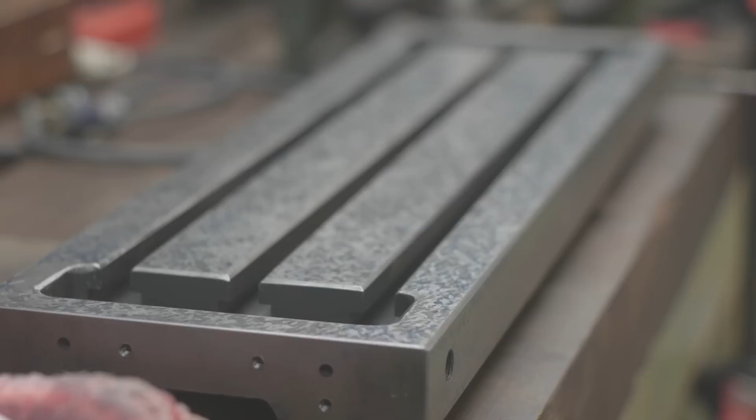He's a professional at scraping and we're going to try and make scraping fun to watch. So we're going to be doing the mill table exclusively in this video. We're going to be scraping the top surface all the way through to the dovetails.

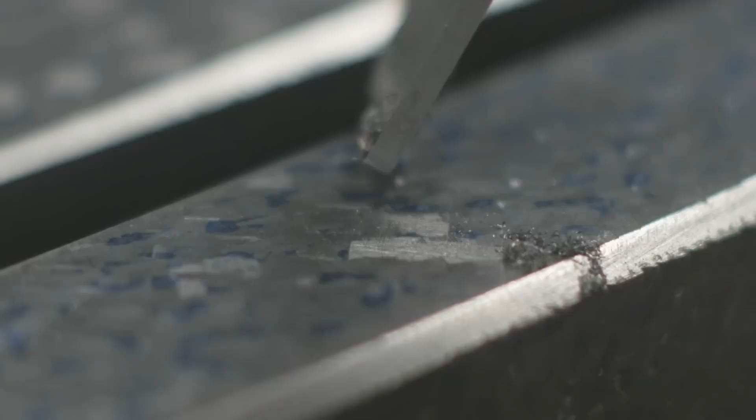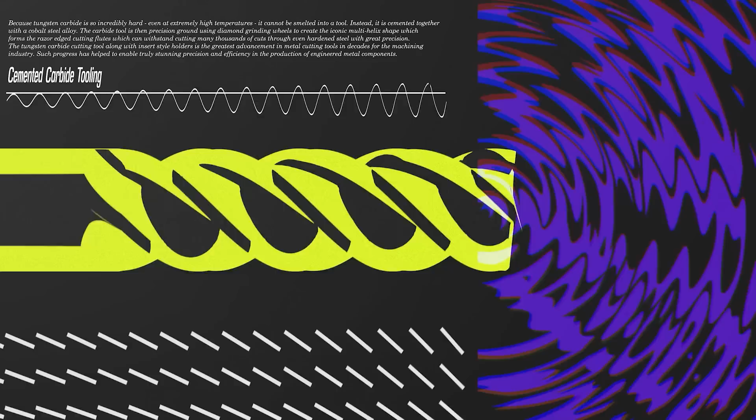The goal of this video, and really the subsequent series that's going to follow, is to take everyone through the process of reconditioning one of these Chinese mills to have proper precision, have good scraped bearing surfaces on all the dovetails. Through the help of my friend Marcus in the Gold Coast, who is an expert on the subject, I've learned so much from him. We'll be getting actual professional help as we go through this whole process. So we're really excited for it, and I hope you like it too.

Scraping is one of those engineering skills that tends to be just as much of a practical discipline as it is an art. I think that's probably because machine builders tend to avoid it because it's slow and expensive and you need a very highly trained person to do it. But there is some serious advantages to it. And the goal of scraping is usually just to make a flat surface, but that's not always the case.

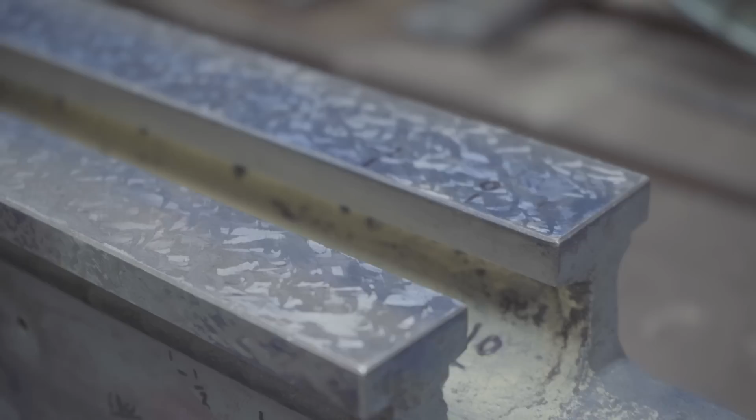A flat surface might be good for making bearing surfaces that need to run straight and true. But it could also just be for mating two rigid mounting points, like mounting the column to the base of the mill. That's not a moving surface, so it doesn't necessarily need to be flat. They just need to mate up with a lot of contact points for rigidity and to hold the column square. So scraping is more about matching surfaces rather than making flat surfaces.

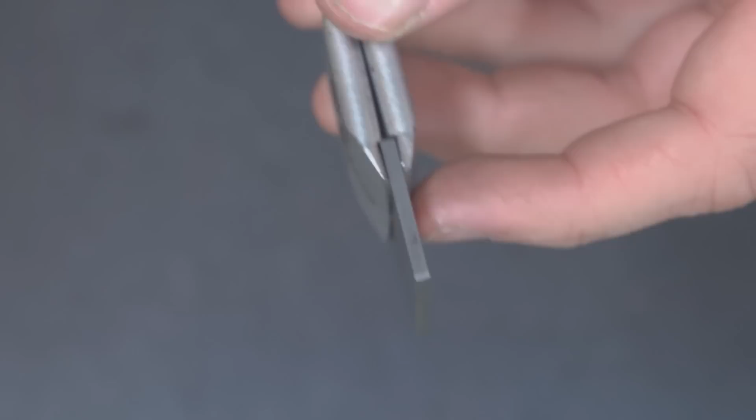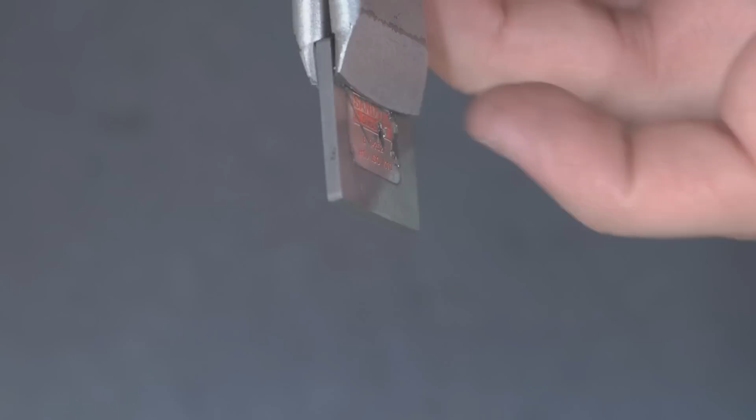To scrape those blue high spots, you'll usually use a scraper, which is creatively named. It's pretty simple, really. It's just a piece of steel with a handle, and you get this carbide blade. It's just a flat piece that's clamped in with this mechanism, a screw, and this would have probably a 135 millimeter radius across here. It's double-sided, so you can flip it over and use that one too. And those would be ground at probably a 5-degree rake right now.

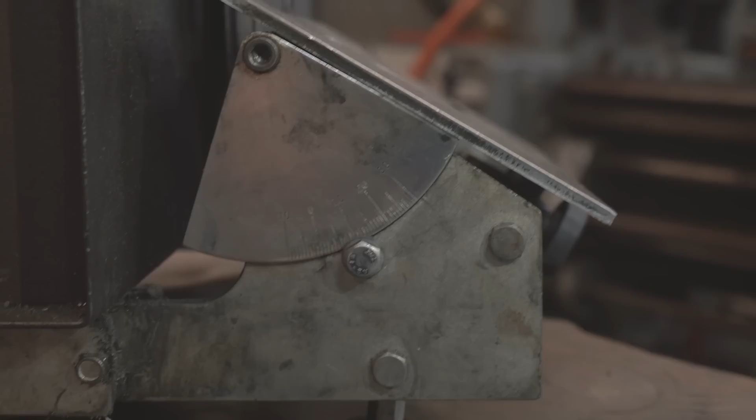To sharpen the carbide, Marcus uses this low RPM disc sharpener called an AccuFinish with diamond discs on it. So that's a pretty typical looking one. However, Marcus really likes this pommel type of thing, or mushroom as he calls it, which is good for being able to go off the palm and especially for going off the shoulder. This took me a while to get used to, but it actually is really valuable to be able to go off the shoulder when you're roughing, or really most of the time. It's quite good. So that's what he likes to use, and now I like to use that too.

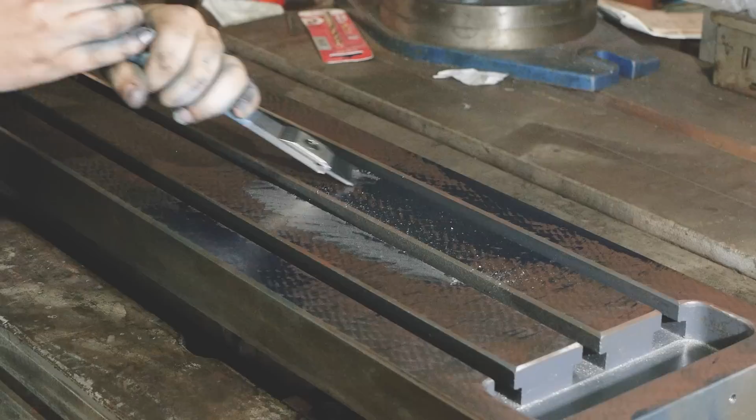And once you've scraped off all of those blue high spots from the first print, you go and do another one, see if the print pattern has changed or if you just need to take more off of the same spot, which is common for the start at least.

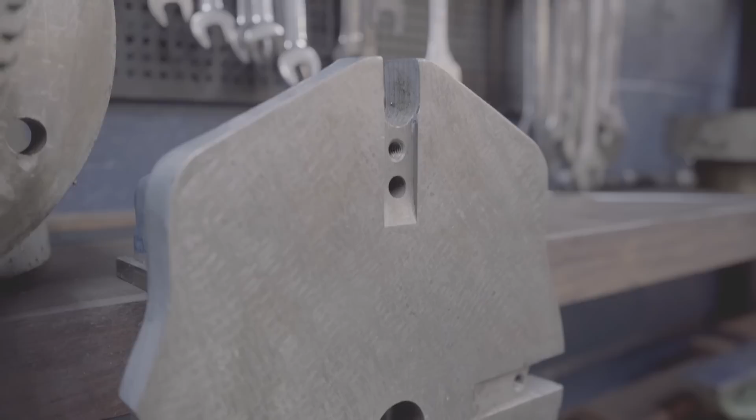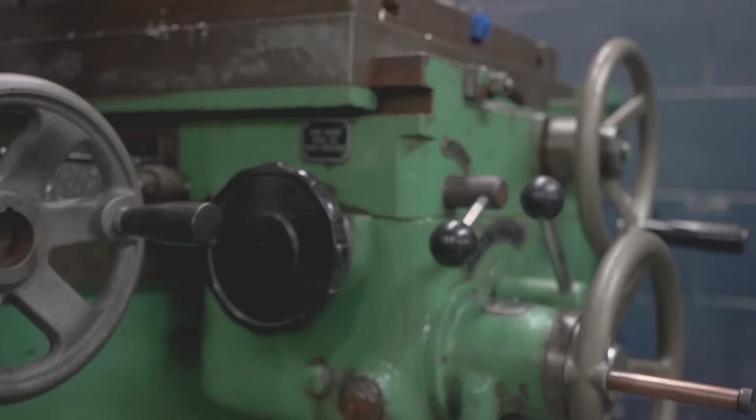So why would we actually bother with scraping as opposed to surface grinding? Because surface grinding is faster, it creates exceptionally flat surfaces. What are the advantages to scraping? Well, remember, scraping isn't just about making flat surfaces. It's often about matching surfaces. So there's one benefit already. What if you just need to make one part fit well with another? Or what if it's very hard to grind those pieces flat? What if it's a big heavy machine that's hard or even impossible to set up in another machine for milling and grinding? Instead, you can just scrape that part in place.

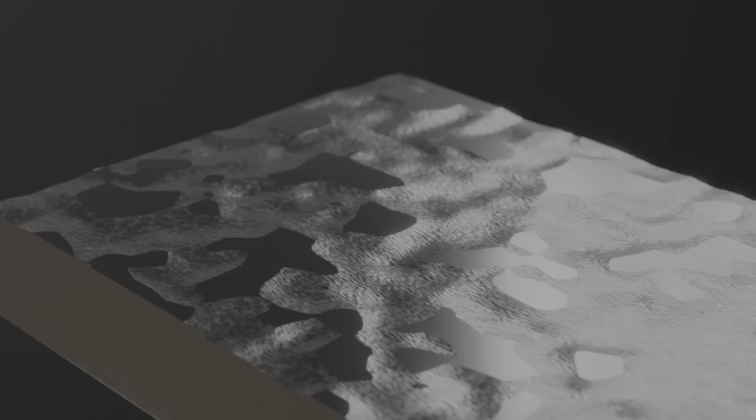Scraping is also especially good for machine slideways because it doesn't produce a smooth surface like grinding. The slight valleys leave space for oil cavities, preventing it from being squeezed out and binding those surfaces together.

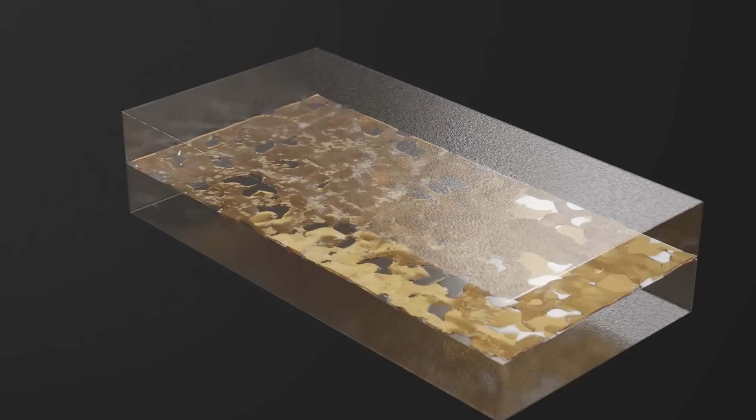To help visualize and explain the concepts in this video, we'll be using this digital replication of my mill table. Using this, I can easily produce certain effects like twist in the surface. I can bend it longitudinally and latitudinally. And I can also apply a height map over the surface to clearly show the effects of that twist and bend.

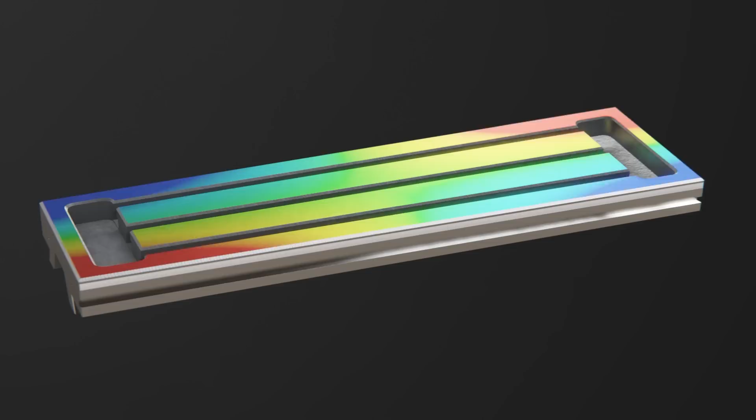And I can even produce concentrated high and low spots. Here's a key to help you read the colors. Think of the middle green as the idealized neutral height, the target of this visualization. This is what a perfectly flat surface looks like in this visualization. As the color in a certain area goes from green to yellow to red, it's deviating further from what we'll call acceptably flat. Now I'll introduce a pattern to imitate the texture of a scraped surface.

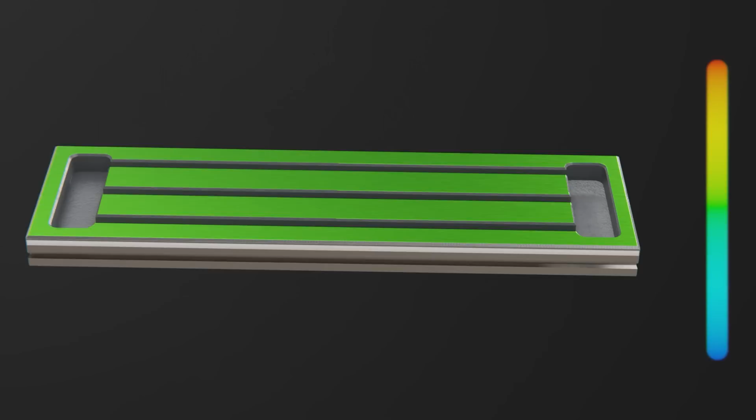The hope is that this will help clarify further what a surface is doing when it's scraped. I can also translate this directly to imitate a print against a flat surface plate. Throughout the rest of this video, I'll be using any combination of these effects to help explain what I'm talking about.

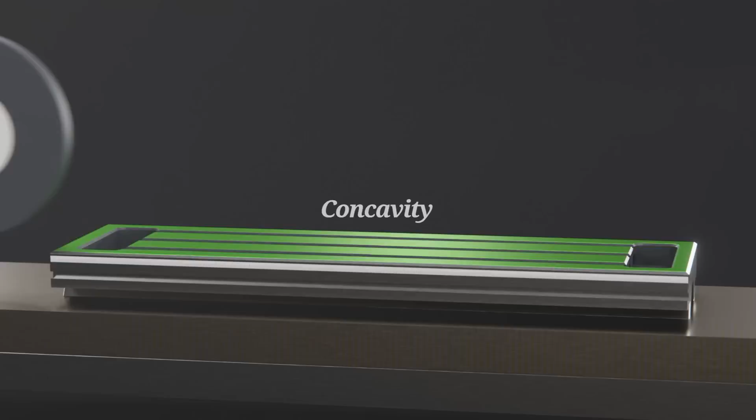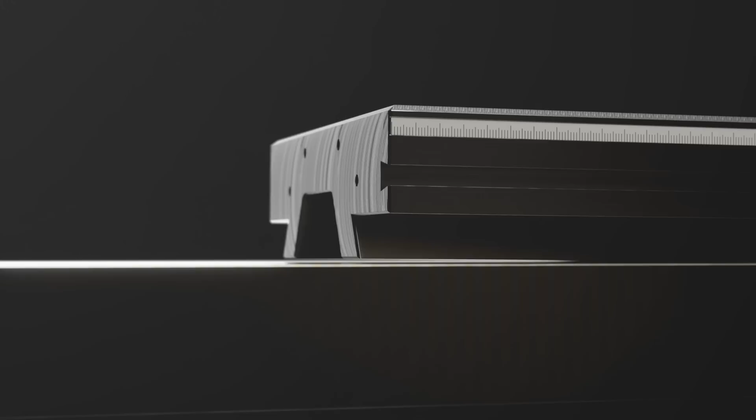The top surface is ground at the factory, which causes it to heat up, which makes it bow upwards, but they keep grinding until it neutralizes and becomes flat, and when it cools down, it becomes concave. Grinding also needs to hold the part rigidly in place, usually with a magnetic chuck. This will warp the part some amount, which springs back once released, whereas scraping doesn't produce any significant force on the part.

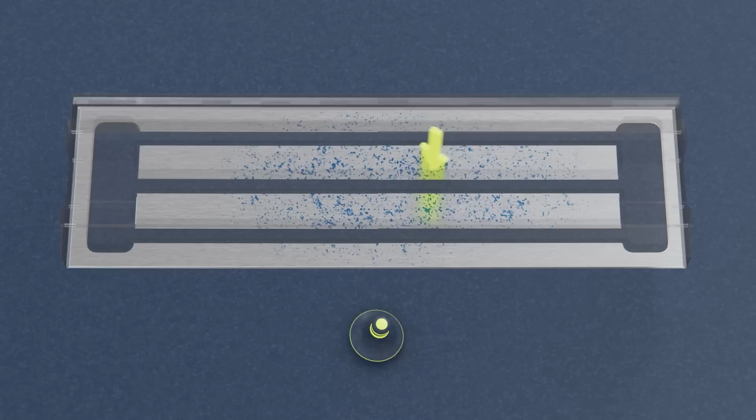One of the first things you want to do when scraping a flat surface is remove convexity, because if it's rolling around the center area, it'll print up a large area that isn't actually the high point. In theory, you could actually print up a whole convex surface by just rolling it all the way around, and it's misleading. You'll look at it and think it's flat, because look, it's all blue, I've got a flat surface, but it's a misleading print, so you need to stabilize the surface.

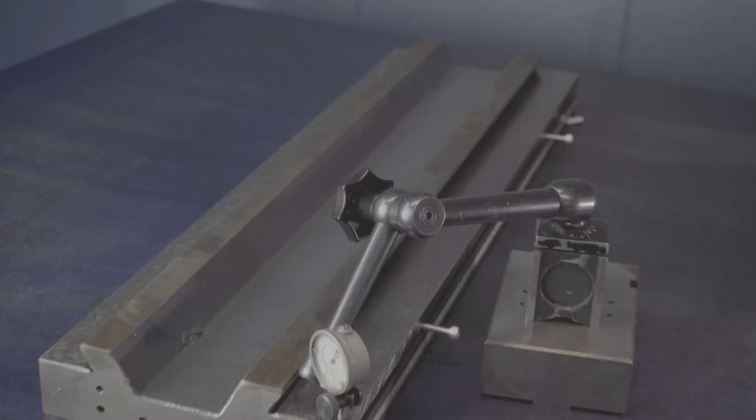A way to check for convexity is to lay the table on the surface plate, put an indicator on one corner, and press down on opposing corners to see if you can rock it back and forth.

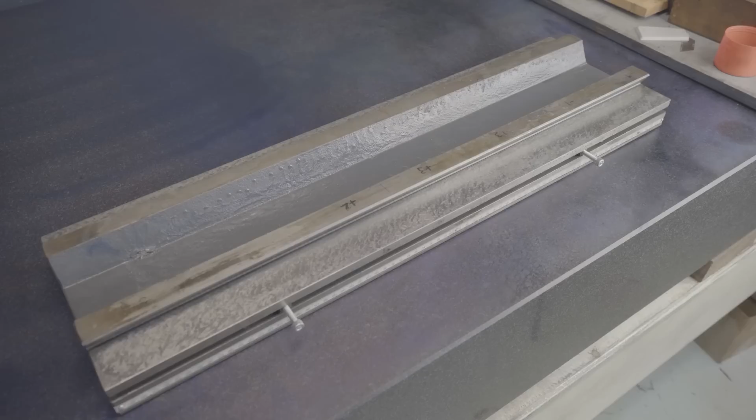As an example of a pivot test, this surface should be pretty flat on the table, so it should have a fairly vague sort of pivoting action. I can tell that it's pivoting around here a little bit, so maybe that's still a slight high spot, but it's kind of vague and it's hard to move.

If there was a convexity and it was sitting at this point very distinctly, it'd be easy to spin and it would clearly pivot from there. If it was twisted and this was the high point, it would very clearly pivot from that point over there. And if I was moving this side, it would pivot from there.

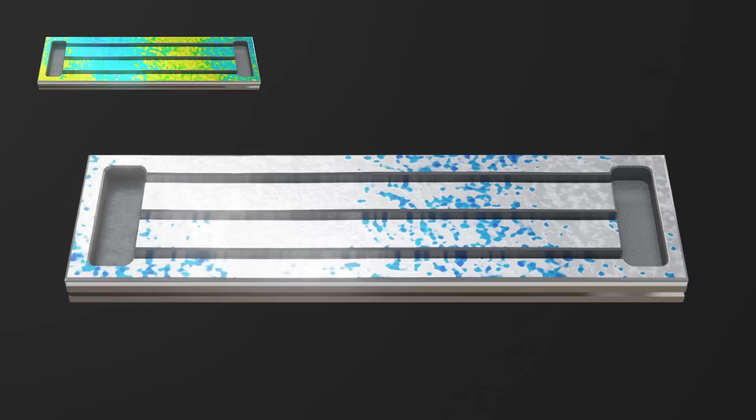First, we roughed out that patch near the middle. Then we took out more material from the middle to eliminate any further convexity. Then gradually brought in the corners and ended up with a stabilized surface.

And once the roughing was done, we started focusing on getting a higher PPI.

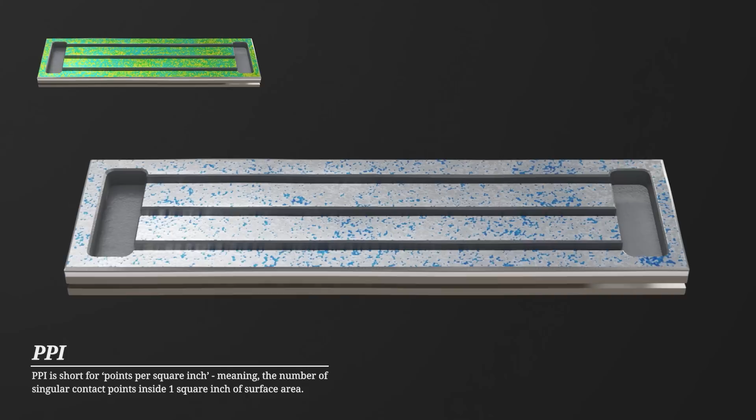I found it really easy to start scraping lighter and lighter because you don't really know how much material you've removed yet. When you're not used to it, it's hard. You're worried that you're going to stuff up the surface. So you start scraping lighter and lighter, and you might even start being a perfectionist and try and get all these little bits just right, when really you've got heaps more material to remove before you're even close to having a flat surface.

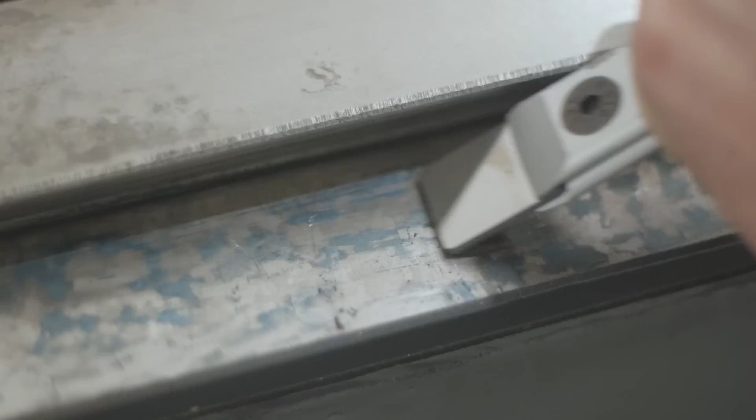I suppose this chicken scratching, bitching thing is a consequence of not really having a feeling for how much material you need to remove or how much is left to go. You want to be a perfectionist and not stuff it up. But the fact is, you've got plenty of material left when you're roughing.

Really, you need to do roughing before you start finishing. It's easy to start getting perfectionist.

As long as you are staying consistent across the whole surface, so you're not going back over the same part that you've scraped, and you're just keeping an even pressure, and even the sharpness of your edge can start to affect your depth. So you need to keep things consistent across the whole surface, each pass, and then you should be fine.

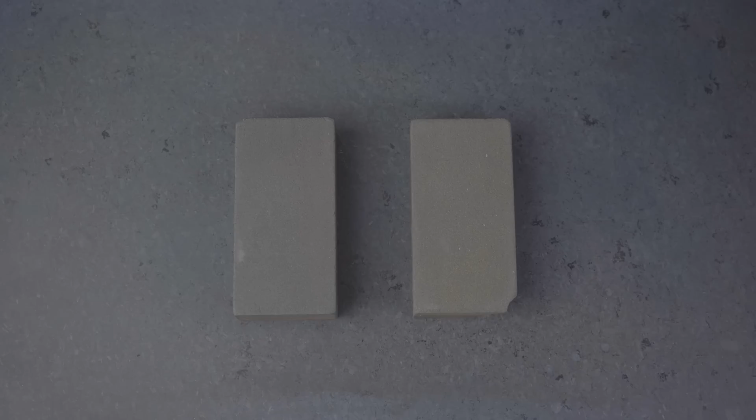Right now would be a good time to talk about these magical things. These are precision ground stones. They've had these surfaces ground to a very flat surface.

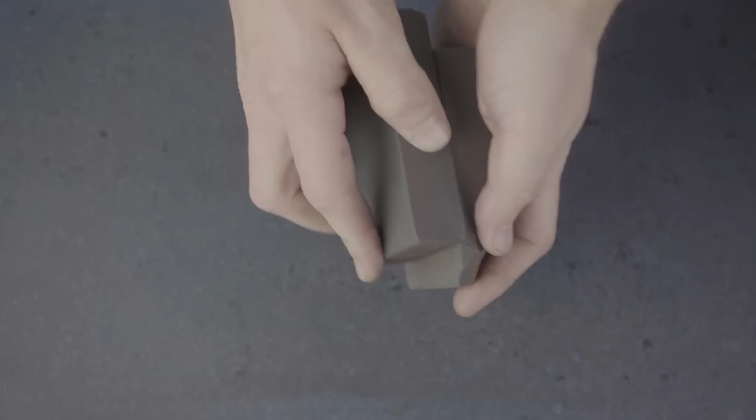And what you do is you rub them together until you get all the grit off. And then you use that to grind away or stone away the peaks from your scraping and also the burrs. And it takes a lot of the expertise out of scraping, so you can get nice flat plateaus for good contact, and it polishes them very nicely too. So these are super nice.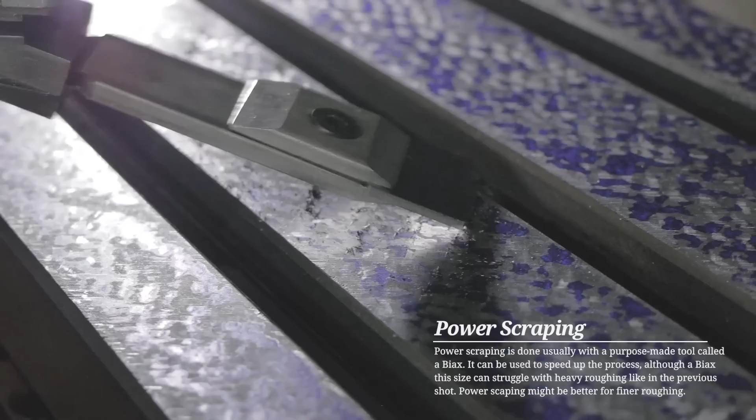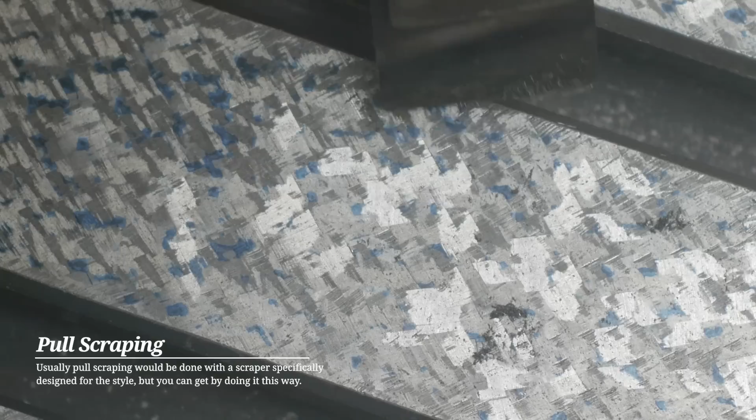After roughing, we moved on to finishing, and I really like the look of pull scraping. I was able to stick with the mushroom handle and keep the large radius on the carbide, just shifting the angle you hold it at. Instead of a forward action, you shift it up really vertical and pull - it's in the name. I spent as much time as I dared trying to get as many contact points out as I could. It's not super high contact points per inch, but Marcus tells me it should be good enough for the surface. The other option is push scraping, a curl action, which we did for most of the other surfaces on the table, but I wanted something different and nicer for the very visible top surface.

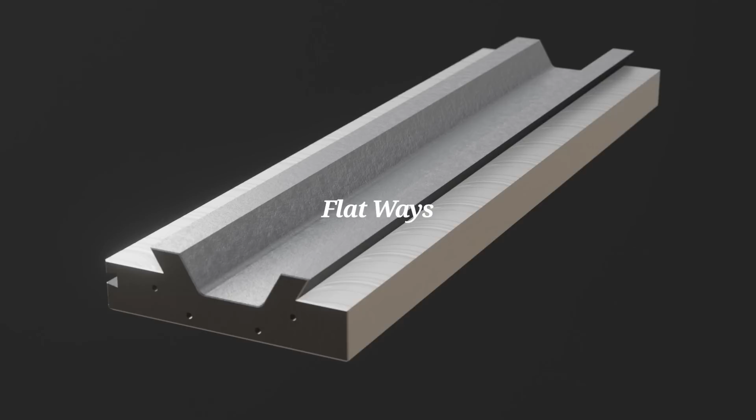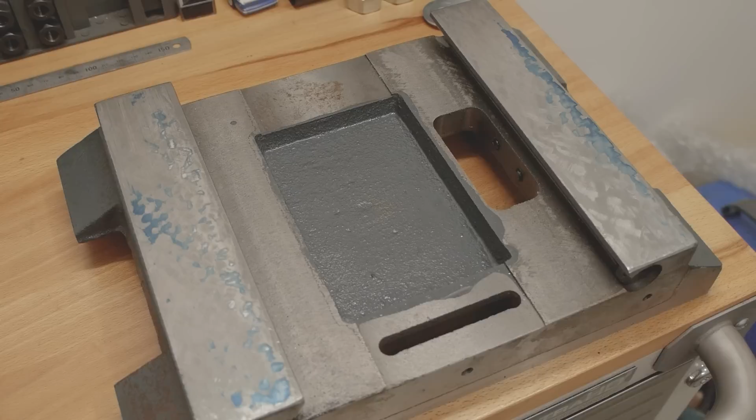Next, we focused on getting the flatways actually flat and parallel to the tabletop we just scraped. Surprisingly, but also logically, you only really need to make the flatways parallel relative to the top surface - the two flatways don't need to be parallel in the perpendicular direction, and they don't even need to be coplanar. This is because you're just matching the saddle up to whatever results you get on these flatways. Chances are your flatways won't be coplanar, and that's okay, because from the factory they would have matched the saddle up and made everything aligned. If you mess with that too much, you'll be giving yourself more work - just focus on making the flatways flat, not messing with their geometry.

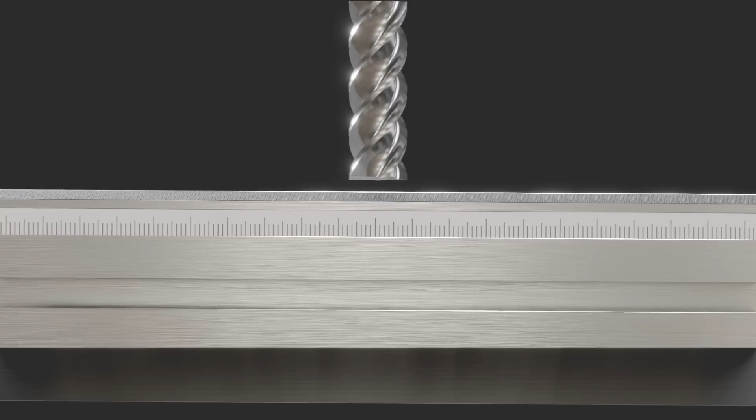If the flatways are not made parallel to the top surface, as mentioned, then this is the consequence: as it slides along the x-axis, the top surface's relative Z location changes.

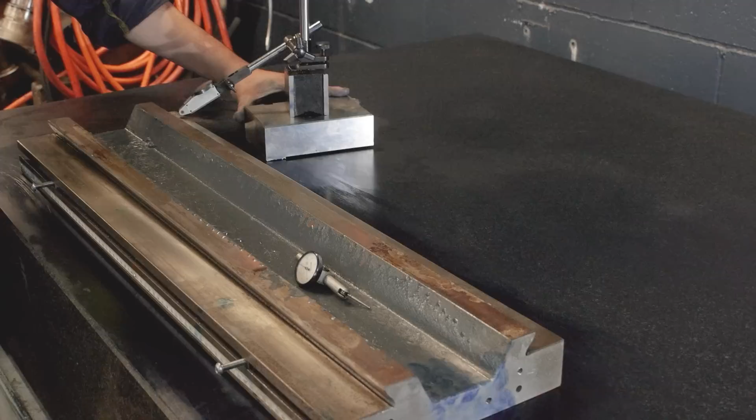We laid out the table with the top facing down, and with a 10,000ths indicator on a sled, we swept across the surface to measure the variation. They weren't awful, but definitely could be improved. Even if they were geometrically good, they have a terrible surface finish from the factory that scraping can fix.

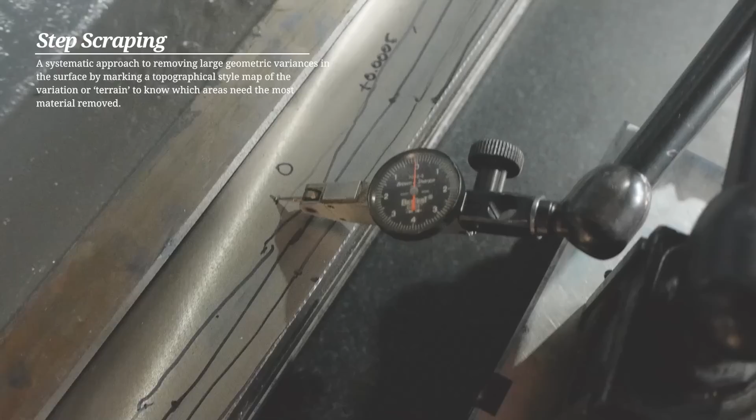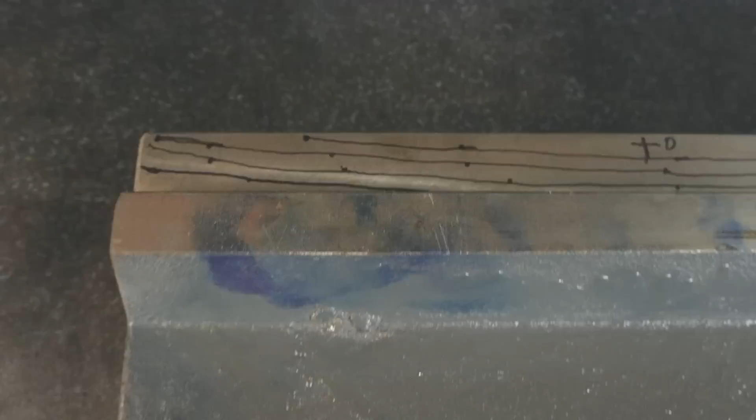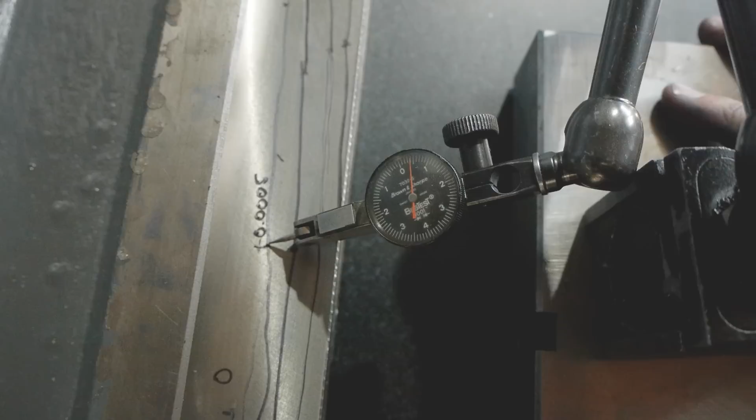Doing these flatways was where I really started to learn about the process of step scraping, which is where you use an indicator to run along the surface and mark out a topographical map of the height variations. The interval between each graduation I used was 5/10,000ths of an inch, because our indicator was reading 10,000ths, and the depth of a single scrape that Marcus was reading on his work was about 5/10,000ths, so it seemed like a good graduation to work off of. But you should always check the depth of your scrape before deciding on the graduation size. It can be a little tricky to get the whole surface mapped out perfectly, so don't try to do it perfectly.

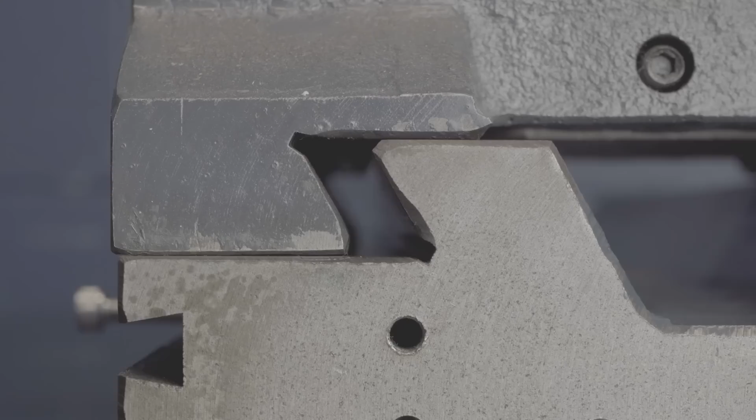Once you've done your topographical map, you're ready to start scraping. Except you're not ready, because you need to actually relieve the area where the gib occupies, since there's not going to be any contact there, and it's hard to scrape into that inner corner where the flatway meets the dovetail. So you just go nuts in that area - it's usually only a small section where the gib would live, and there's no contact with the saddle or the base, so you just rough it out. We even used a warding file to file all that out. If you want to be a complete nutcase, you can even get an angle grinder and just grind away that whole inner corner to relieve it.

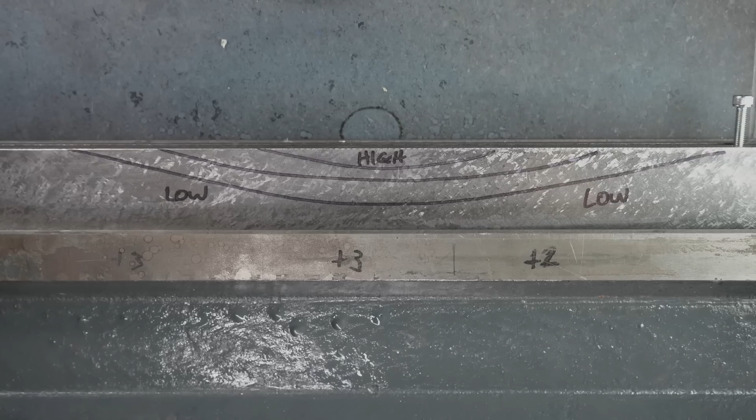Then you can come back and work on your topographical map. So this is how the step scraping works: we've got what would be a bulge here, and it comes down to basically our zero point. We want to get everything level with this low region, so you'd start off by scraping the high point.

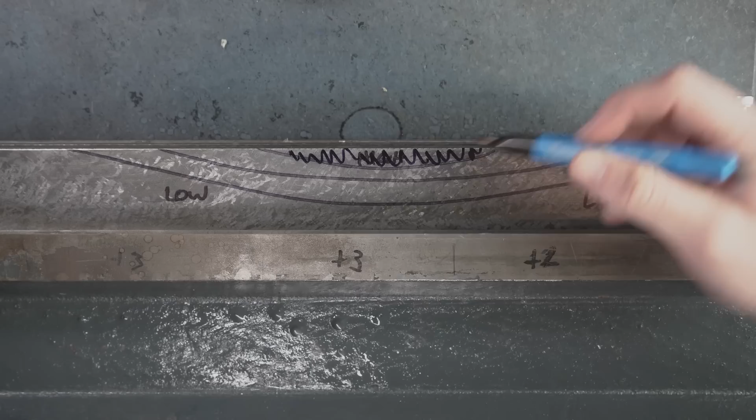On your next pass, scrape in the perpendicular direction to avoid chatter, going over the previous region. Then on the next pass, switch directions of scraping again to avoid chatter, and go over all of the previous ones.

At this point we'd stop because the intention is for all of this to now be roughly level with the low point. We don't want to scrape this because that's our target height.

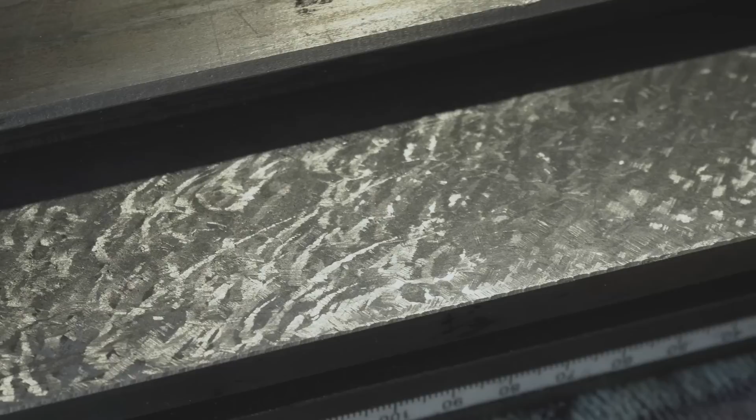Once your topography is within about 1/1000th of an inch of parallelism, you can use a straight edge to start printing and scraping as usual.

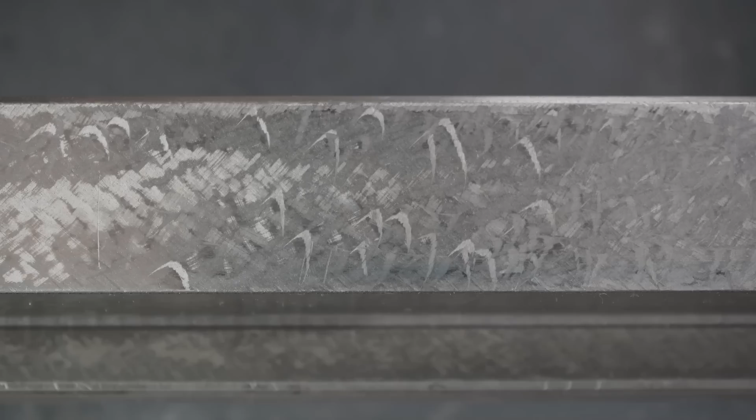This time we used more scraping to finish. This is a nice shot of the more scraping we've done on the back face. They're fairly irregular because we were just targeting the high spots. But these two, especially this one, are a pretty good example. You want it to be sort of symmetrical along this center line.

You can see how it starts off very lightly and gradually leads in. This is where the high spot would have been, so that's the target point. It's a very concentrated scrape, then gradually leads back out and doesn't leave a burr. Whereas something like a pull scrape or other types of scrapes might scrape forward, stop, and lift up, leaving a burr at the point where it stopped. But this one just gradually leads in and out.

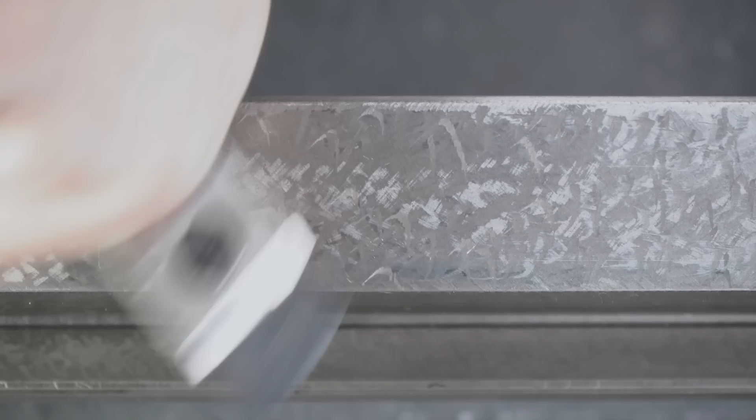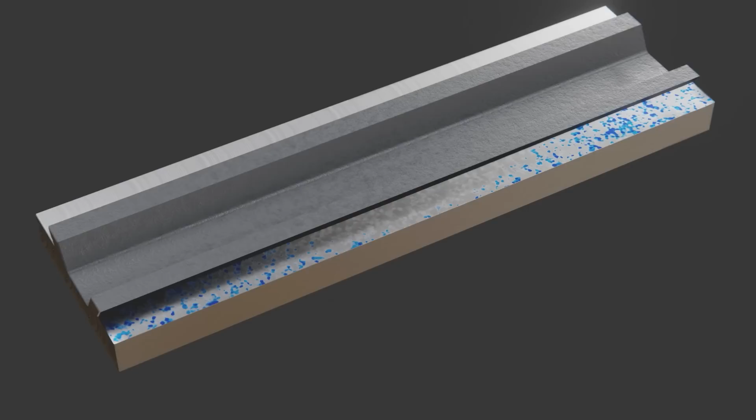Scraping in the flatways was very much the same story as the top surface. It was high on the sides, and you gradually bring those in through roughing. Eventually, once you get to a nice flat, roughed surface, you start chasing higher PPI.

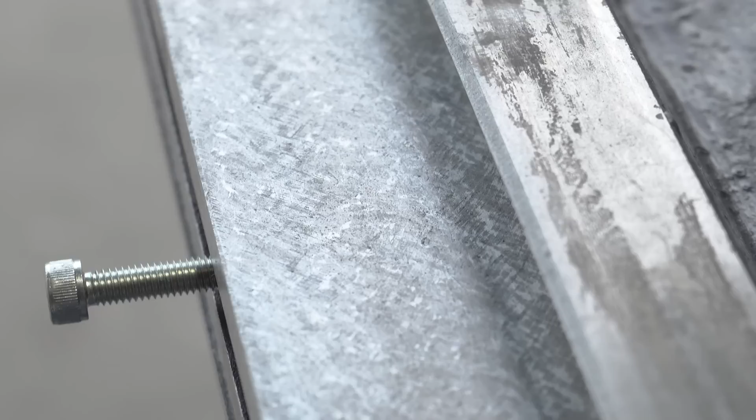Next up was the back face of the mill, the face along the back side of the table. We didn't worry too much about aligning that or squaring it up. We just went straight into scraping it flat, and that'll be good enough for our purposes.

And those purposes are to use it as a straight edge reference against the dovetails for when we're actually trying to align them, because those are a very important part, obviously. It's also just a really nice luxury to have such a trustworthy edge that you can square things up against when you're working on the machine. You could put an engineer's square against it and get something that's going to be quite square to the travel of the x-axis.

And it also looks good too, if anyone's ever looking at the back side of the mill table. So we went straight into breaking up the surface with a single roughing pass over the whole thing.

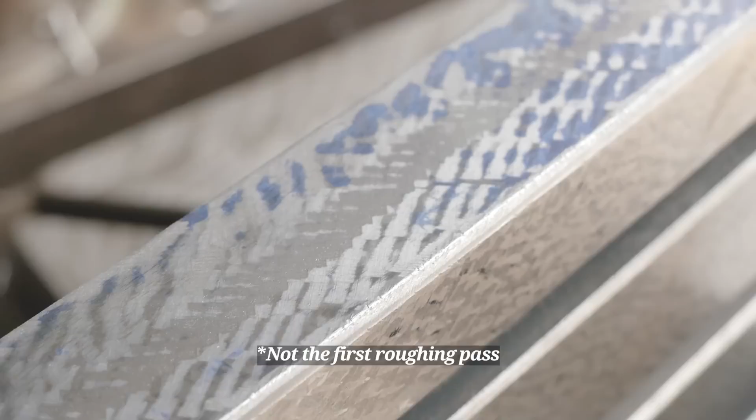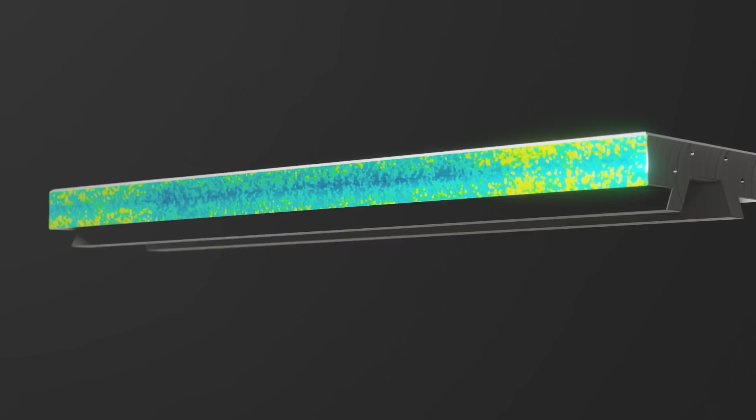Then print the face up and make sure it's not convex. You always want to look for convexity or twist when starting. To make sure there's no convexity going on, we scraped a line down the middle longitudinally and made sure there was no contact transversely.

Now you basically just repeat the same usual process of scraping, printing, scraping until you're ready to start roughing. Finishing.

Now, I was pretty anxious about messing with the dovetails. If I didn't have Marcus's help, I definitely wouldn't have messed with them. I wouldn't have known how to, and I wouldn't have had the tools to do it either. But with his help, it was actually pretty easy and satisfying too, and quick too.

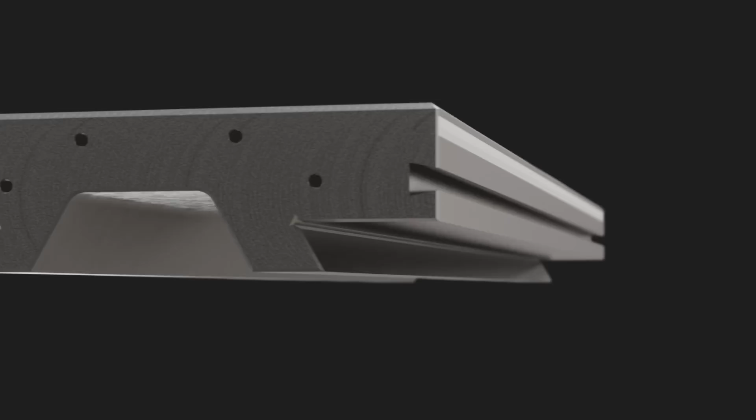The goal is to make them flat and make them parallel to the table only in the longitudinal direction. The angle of the dovetail wasn't messed with because I guess it just didn't really need to be.

How do we actually measure the parallelism in that critical axis when the dovetail face is tilted so dramatically? Well, that's what we scraped the back face for. That's the reference straight edge.

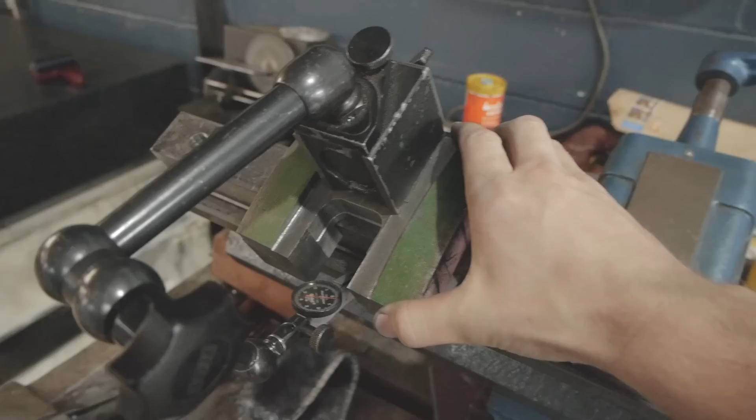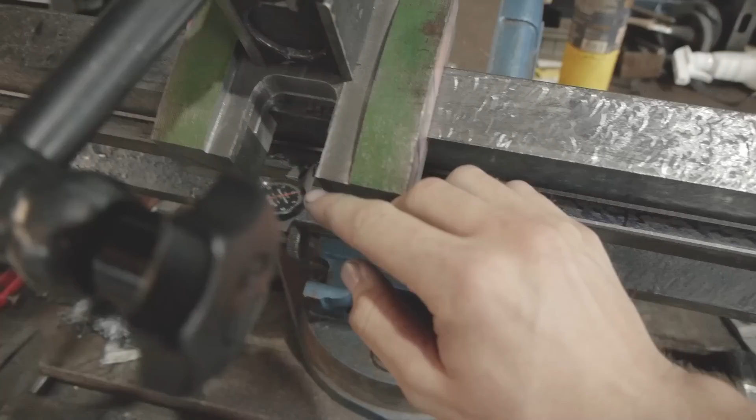So we made up this sled out of a big piece of scrap cast iron, and it fits over the edge of the table. Then you can use the back face and either the flatway that has already been scraped flat, or the top surface of the table, which has also been scraped flat. Once you've got that pressed up against those two surfaces, you've got one final degree of freedom, which will run a very straight line.

So you attach a mag base on top of that, put it on the dovetail surface, and now you can measure pretty well the parallelism along the dovetail.

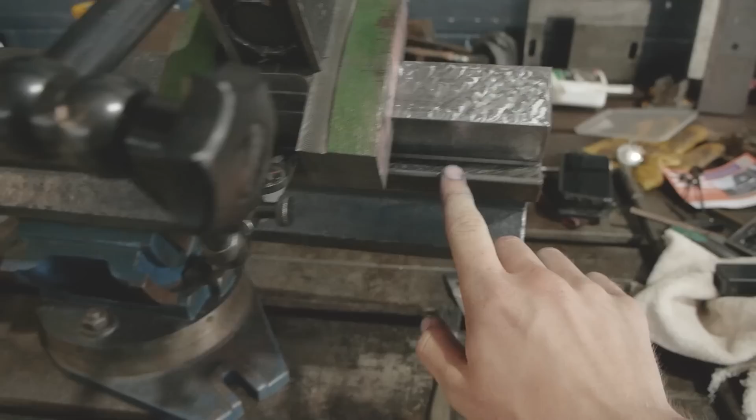Now to explain that a bit further, we started off with a zero point around about here, and then it progressed to about 5/10 of a thousandth, then about 10, and then 15. So you scrape more here and then more along there until you start to level it out.

At this point, we've gotten up to still zero here. By about here, we've got 5/10,000ths, and it remains 5/10,000ths across the rest of that length. So we've got it almost geometrically correct, and then you want to work on the surface.

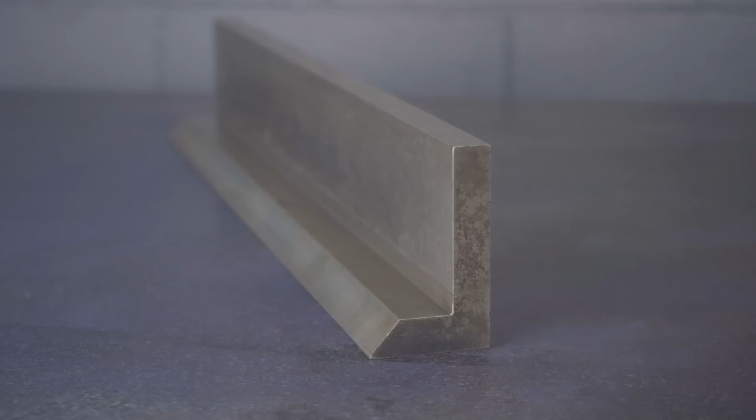To scrape the dovetails, you do need a dovetail straight edge, but beyond that, it's very much the same step scraping process.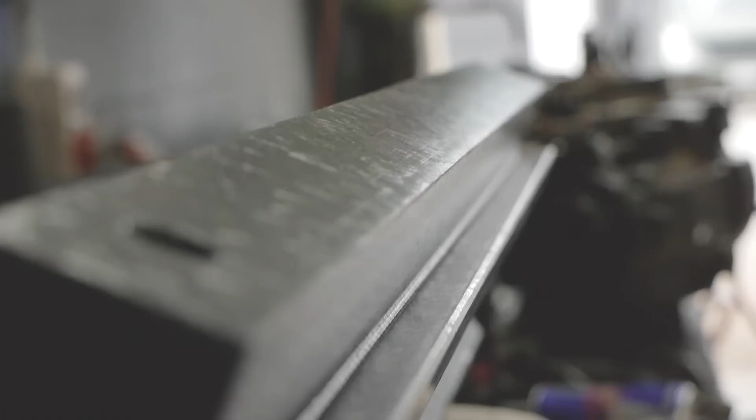The other dovetail is a bit of a different story because the front face of the table isn't a good surface to make a reference straight edge out of, like we did with the back face. So to get around that, you put the table down on the surface plate with that back scraped face, the reference edge, down on the table.

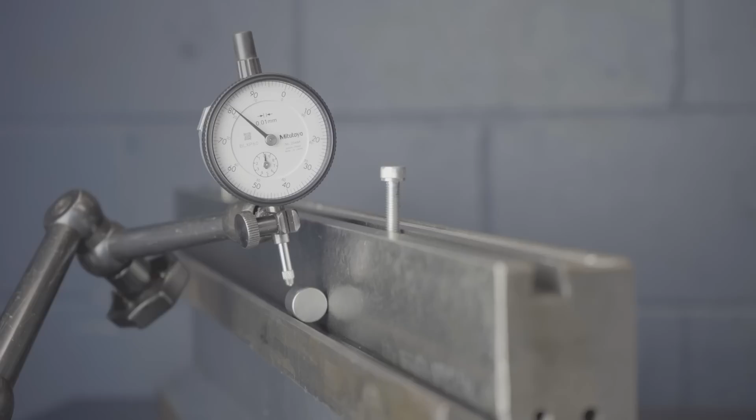Then you get Hoffman rollers, which are cylindrical rollers that are more round than dowel pins. You want to put them inside the dovetail and run an indicator along the apex of those rollers. You measure different points along the dovetail, and that gives you a reading of the variation because you're referencing against that back face on top of the surface plate.

You could also use a micrometer that pinches over the two dovetails with rollers inside to get a variation, but then you risk stacking up the error because you're going from the back face to the dovetail, and now measuring off that dovetail to scrape the next one. So it's better this way.

And if you don't have Hoffman rollers or gauge pins and you're using a dowel pin, you need to know that dowel pins aren't ground between centers, so they get a trilobe sort of shape. If you measure across that dowel pin with a micrometer, it'll always read the correct diameter because the opposing sides cancel out to produce the same outside measurement. But as soon as you put it into a V-block or a dovetail like this, that camming action becomes a problem.

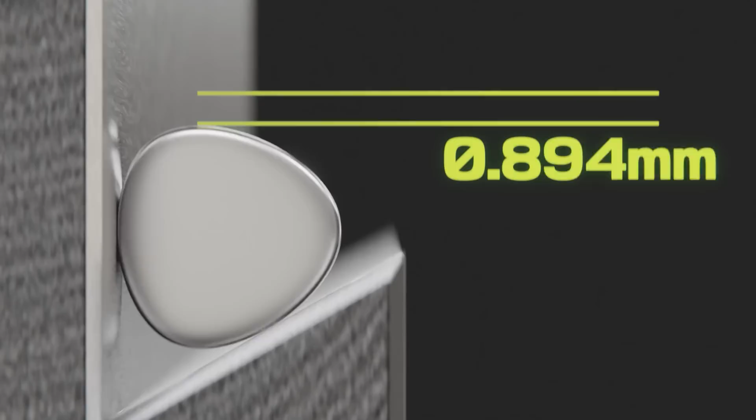You can get around that if you rotate the dowel pin in the dovetail so you can get a reading of the minimum and maximum variation, and then account for that as you take your measurements all the way along the dovetail. But obviously it's a lot more work to do it that way and prone to error. So if you can, get a gauge pin or Hoffman rollers.

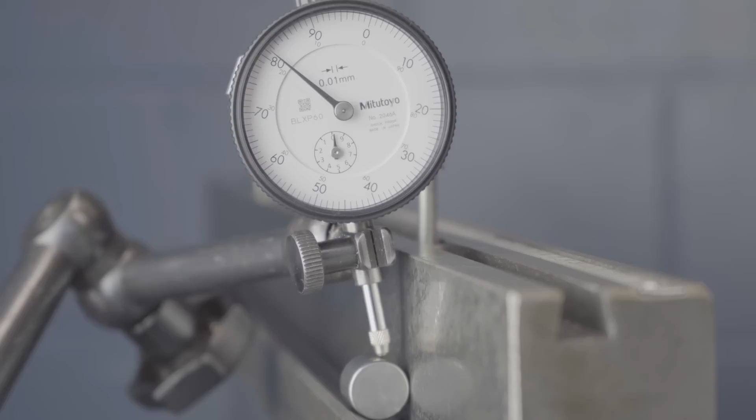Except for that different approach to measuring the second dovetail, the rest is the same as the first. You measure, mark out the topography, and finish scrape.